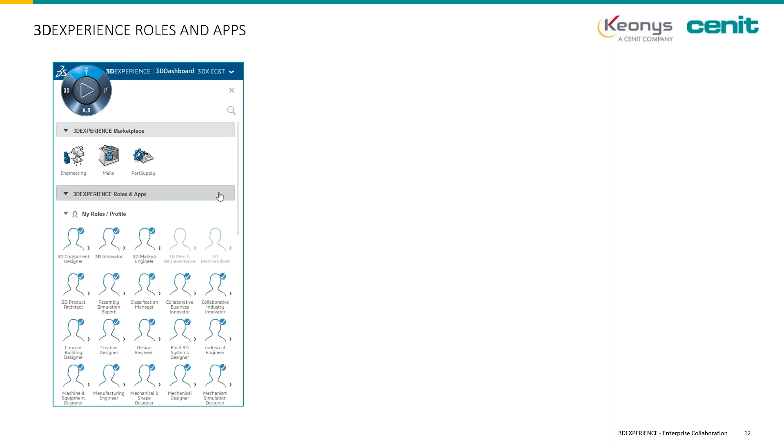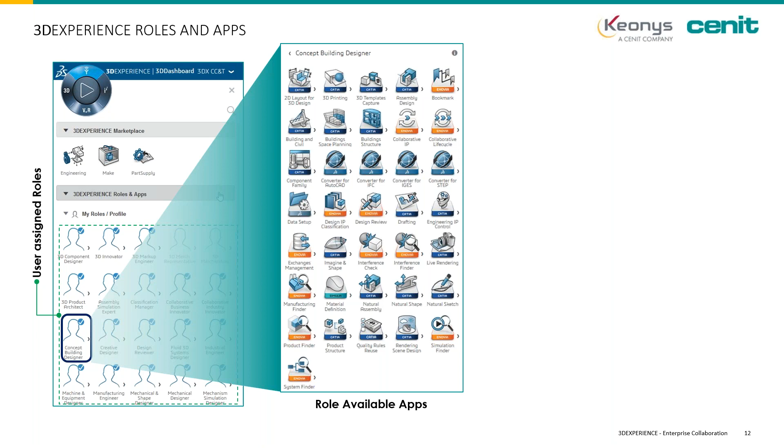If we look in the system, there's a lot of roles that you can adapt. Roles are more or less connected to licenses, and each of those roles is assigned to a user. There can be more roles assigned to one user if you want. Each of those roles has a number of applications, apps as we call them in the system, and these apps result in starting an application on your data where you can do either CATIA or ENOVIA or all sorts of functionalities on your process and data.

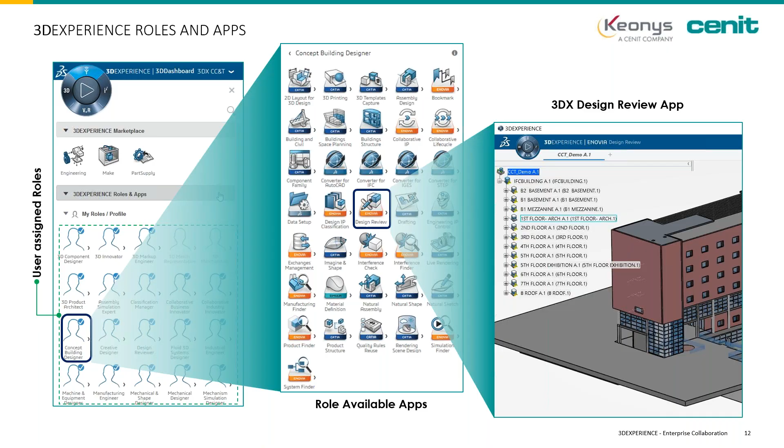We will see this in the demonstration later on how this looks.

If we look at the first level of collaboration, we talk about 3DSwYm for social collaboration and 3D Drive for sharing data. This is the very limited first level of interest into the platform, and it gives you the opportunity to do social collaboration. This means you have a sort of dashboard where you can share ideas, share information, talk to people, discuss with people, and funnel ideas into innovation.

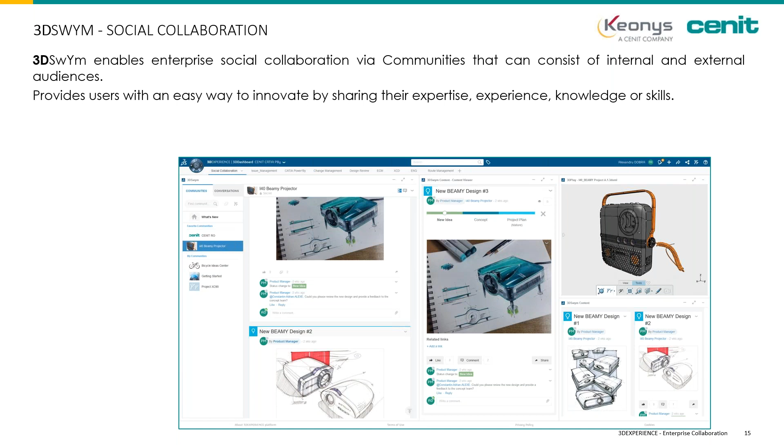This is the user interface. It gives you communities, and it gives you a 3D play to look in 3D at your product. You can chat with other people and share information.

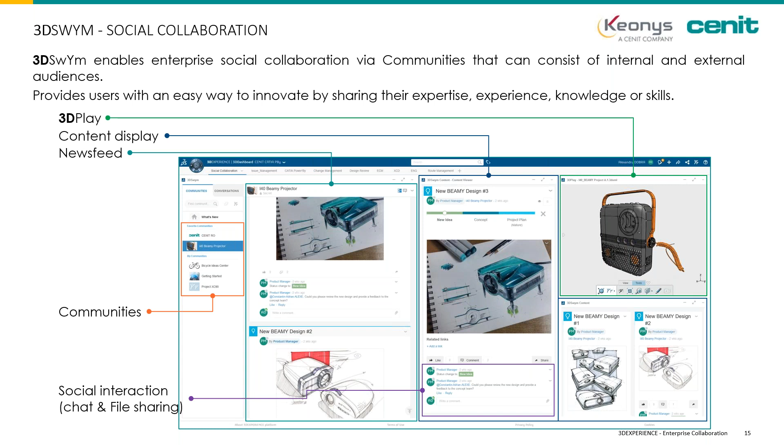3D Drive is also connected to that. This is a sort of cloud hard drive, like you have with Google Drive or with Dropbox. It gives you a very secure way of storing data in the platform on the cloud and sharing it with people that you want to share it with. And you have the tools to view the data, to use 3D Play for 3D viewing, and some tools for analyzing this information, making sections, and so on. It's a very simple way to start sharing information in a platform.

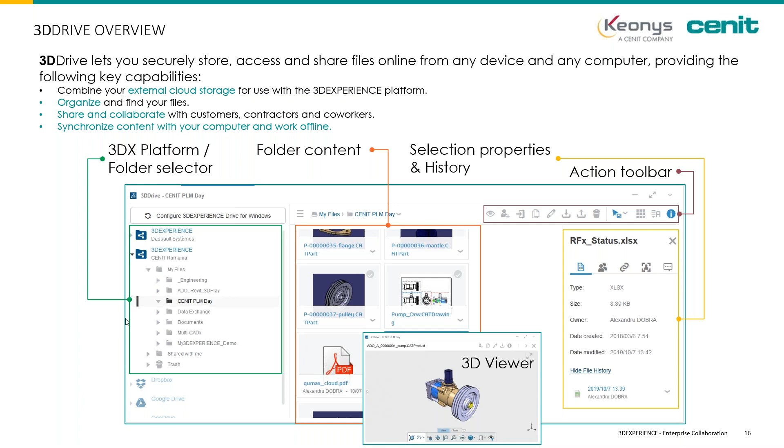And synchronize this, of course, with your local computer.

The next level is enterprise collaboration. This means that we really make a start with entering the world of PLM or PDM, whatever you want to call it.

Here we go to a way of getting data structured in a central database and using all sorts of collaboration on top of that. There's a lot of data files which are non-CAD, or even CAD data from all sorts of applications, not only Dassault applications like CATIA or SolidWorks, but also third-party X-CAD, as we call it, for multi-CAD implementation. We can put all this data into the central platform and use the processes on top of that.

We have the collaborative tasks where we can define the status of data. We have some routes where we can define how a product can be validated, checked, and released for production, all on top of all these types of data.

In the collaboration, we have all sorts of functionalities we can use, like team collaboration, collaborative tasks, and workflows, where we can define how a product is maturing and is being frozen for checking and released for going into production.

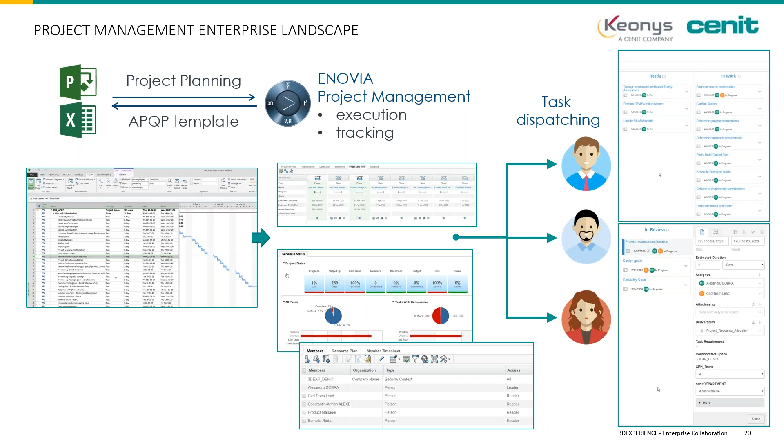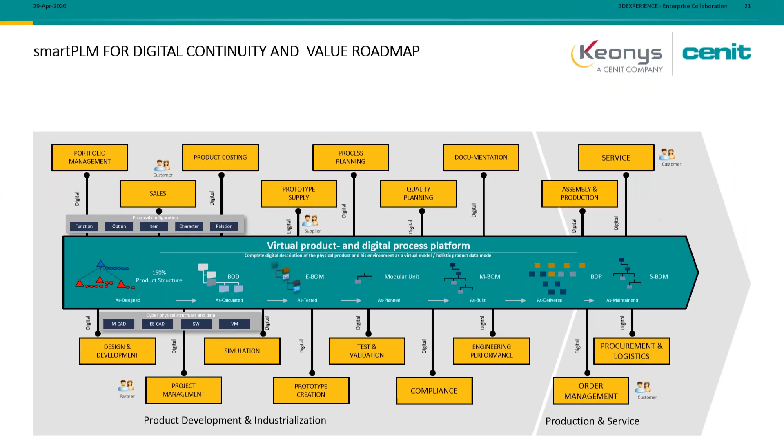When we look at the domains, for SME this is a typical process or definition of a company, with all sorts of department functionalities and processes, each creating data and interconnecting with each other if needed. Within a PLM system, we try to streamline this and put it all on a single platform.

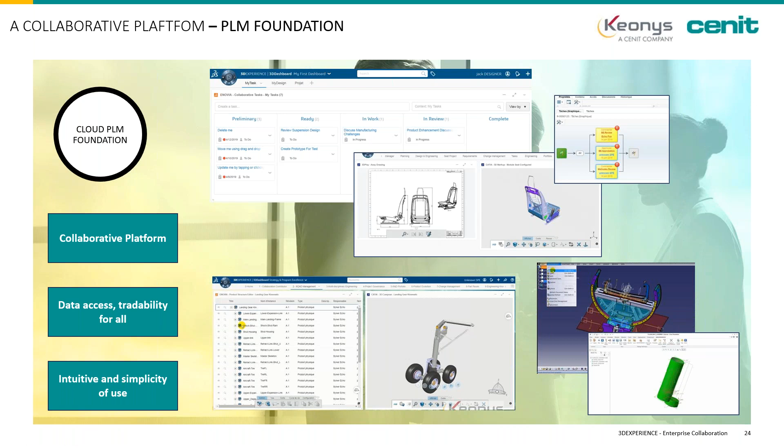It's not only CAD based, we can also take care of all sorts of document management. Here on the right bottom, you see integrations with the Office applications for Word, Excel, and PowerPoint, even connecting to the platform from that application to store your data centrally, find it using full text search, and keep trace of the maturity of your files or documents.

Here on the left, the full text search, where you can use multi-criteria to put filters on to find the right information in the right data, on the right level, the right release of the data.

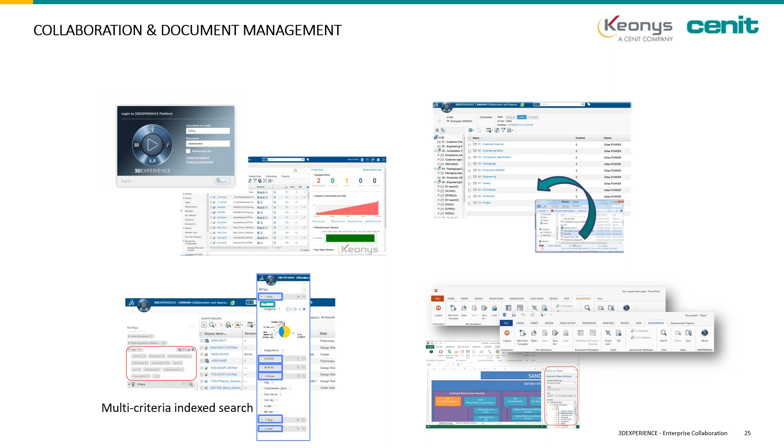And if we look at design, as said, it's multi-CAD. So there are integrations with CATIA V5, which we call multi-CAD because in the platform is CATIA V6 or 3D Experience CATIA, SolidWorks, your connection to NX, Creo, Inventor, and more to come.

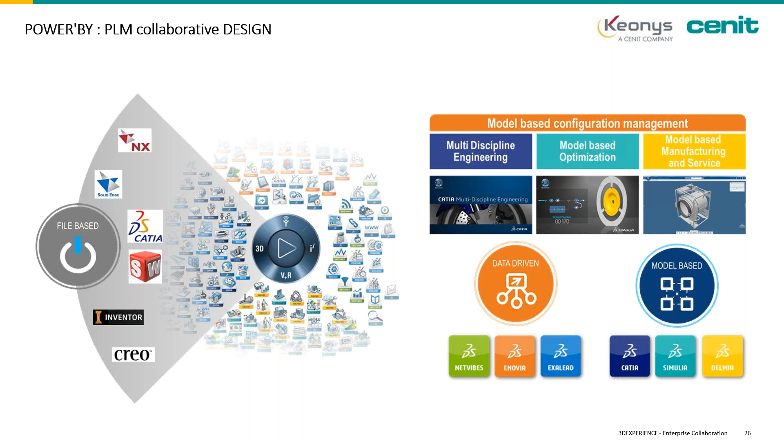And the model-based solution can be used on top of all this data. So if you want to go to full 3D using model-based definition instead of using drawings, having all the information including 3D annotations, you can put it on top of all this data. And it's fully data-driven and not file-based anymore.

Going down the road, engineering BOM management, where we have the right solution to go from your definition of your product, being a CAD assembly or a full engineering bill of material, managing the bill of material going forward to a manufacturing bill of material, going to ERP, managing configurations on top, and variants and so on - the full management of everything that has to do with your product bill of material.

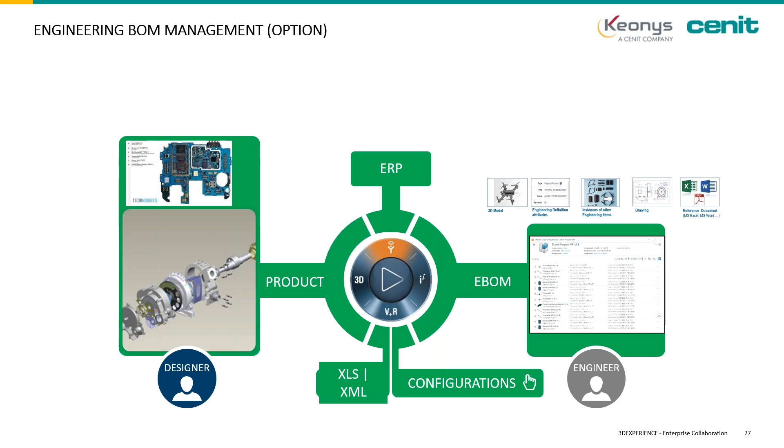If we look at program and project management options that we can put on top of that foundation, as we said, you see here the Gantt diagram. On top, you see the project manager view on gates, going from one gate to another, with nice dashboards to look at the status and maturity of the project, and even some financials if you want to. On the bottom, some risk management to see what the risk is within your project.

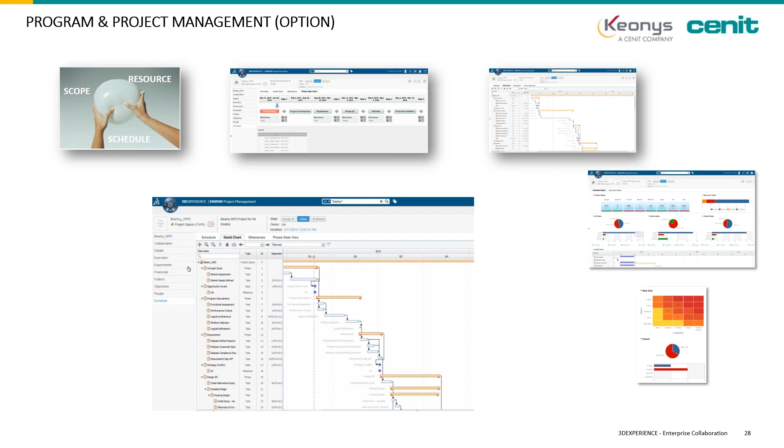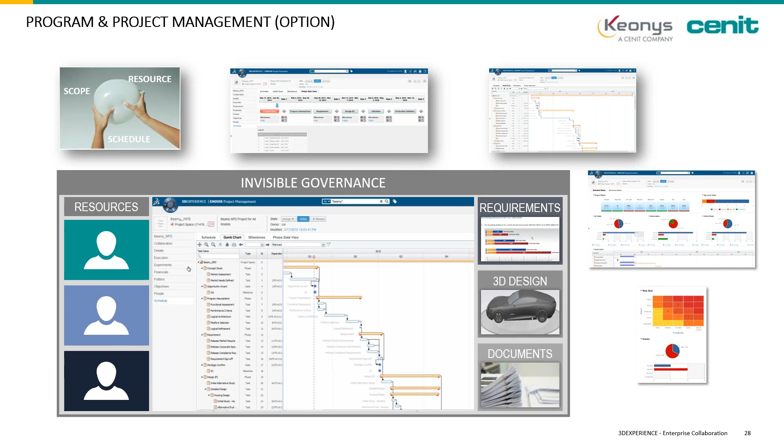And we handle resources, of course, we handle requirements, we handle all sorts of documents, and it's a complete governance overall, not only for one project, but there's a multiple view over multiple projects. So if you look at resources, you can see the load on a resource through the various projects he's connected to.

Here it is. In this, we will go over a review of the initial functionalities in the system.

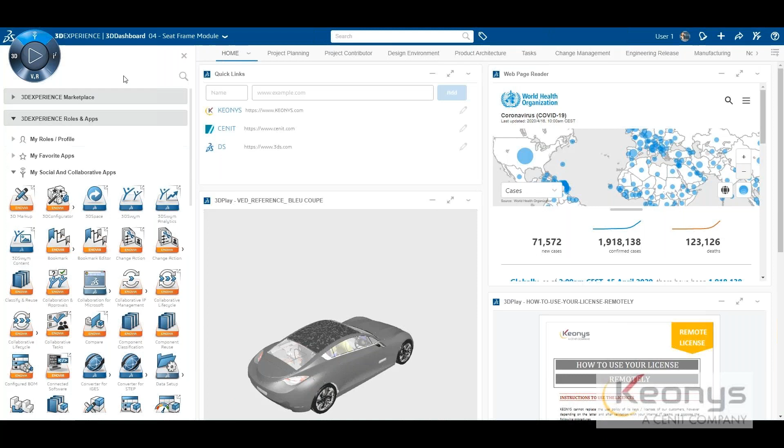This user has a lot of roles. Normally you have 1 or 2 or maybe 3. Connected to those roles, you see the applications you can use, and applications are called apps, of course.

And here's a dashboard. On this dashboard, you can share all sorts of information that you want to see when you log in. Like here, looking at the status of COVID at the moment, it's just a public website you have connected to, or you have some documents you want to see and keep track of.

Or you can even do some markup in this document, or any data here, you can enrich with remarks that are shared in the system.

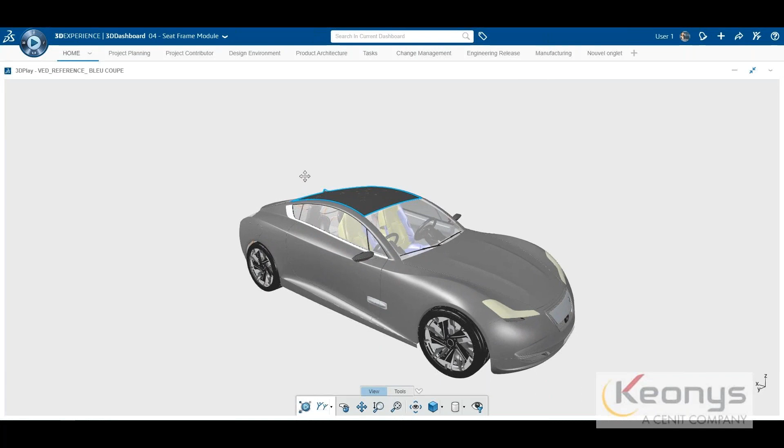Here's a 3DPlay functionality where you can have a look at the product. There's some nice functionalities, and this is all done from a web browser. You can have a look at the insides of a product using this kind of exploded view.

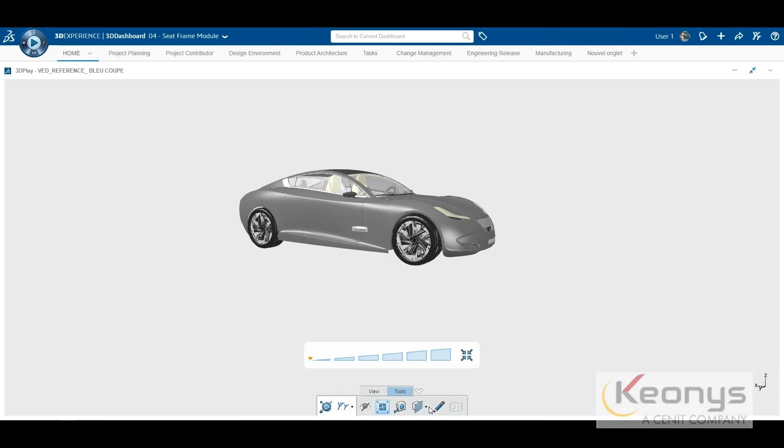This is a product with 600 or 700 parts, I believe, so it's quite large. It's not the full product, but it's quite large, and you see how it is handled in just a normal web interface. You can make sections if you want to.

Have a look inside and look at some of the details of the data. You can do some measurement on size, length, whatever you want to measure. And it's quite fluid in how to handle this interface.

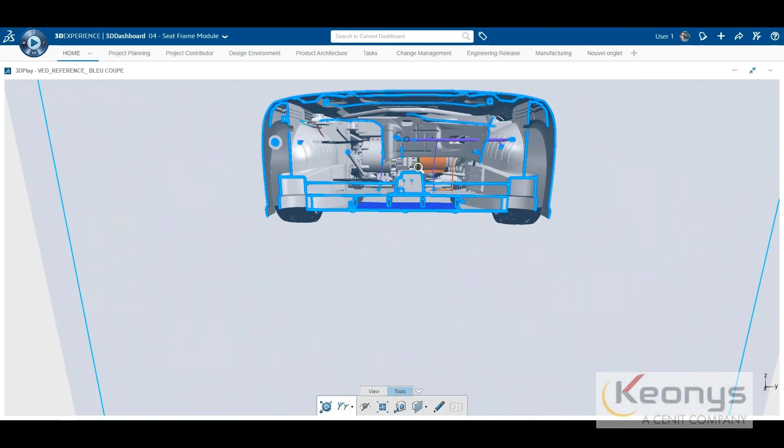We have some tabs. If you log in and you are a project manager, you do the project management. Here you see an overview. We come from the standard dashboard where you can define the widget, what you want to see. This is my project, so here you see the project you're project manager from, and you can see the status of that.

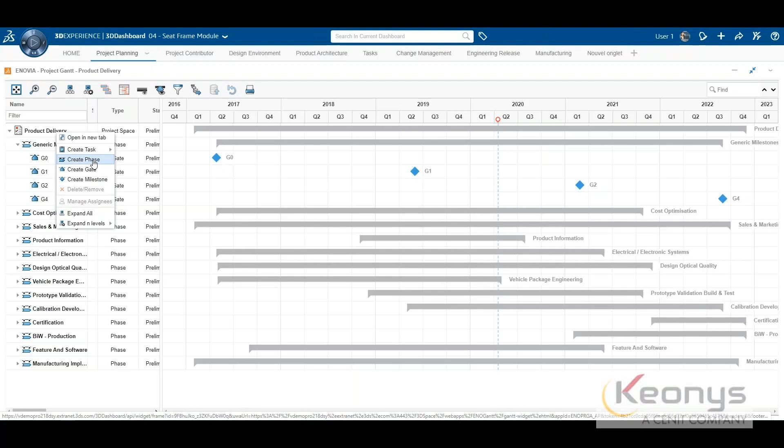If you look in a specific project, you can look into the Gantt diagram of this project. You see the status, where you are on the various steps and tasks that are defined here. You can define gates, phases, and milestones. It's like a Microsoft Project, but fully integrated in the system. And as said, each task has a connection to the data that needs to be handled.

Here you see the project contributor. This means this is somebody that's part of a project. He has been assigned some tasks. You can look at the data that is assigned to him. You can see the document, of course, and have a look at it. This is a PDF.

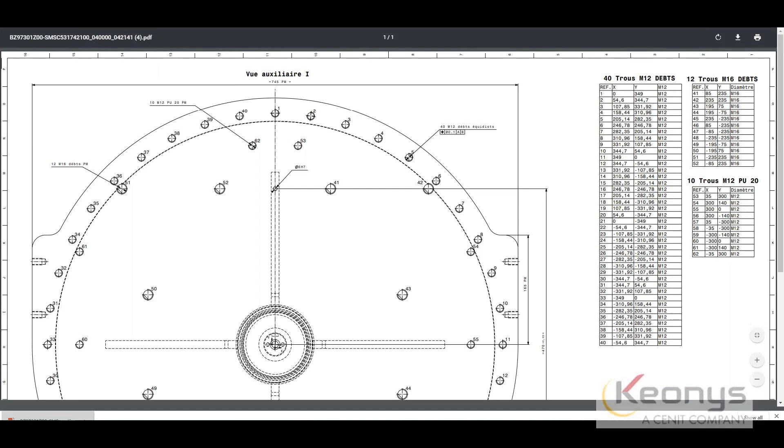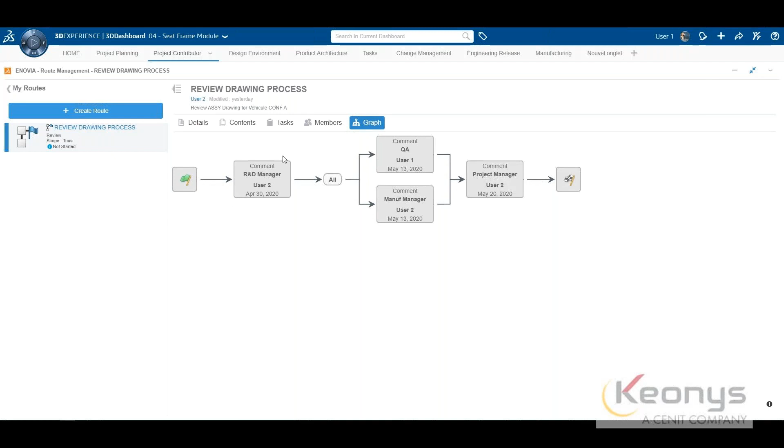Based on his access rights, if you look at review processes, you can also define that it's not just a simple review, but there is a more complex review using this workflow where more people have a say about this data before it's being released, like quality manager or manufacturing manager or whatever, who needs to say about this data before release.

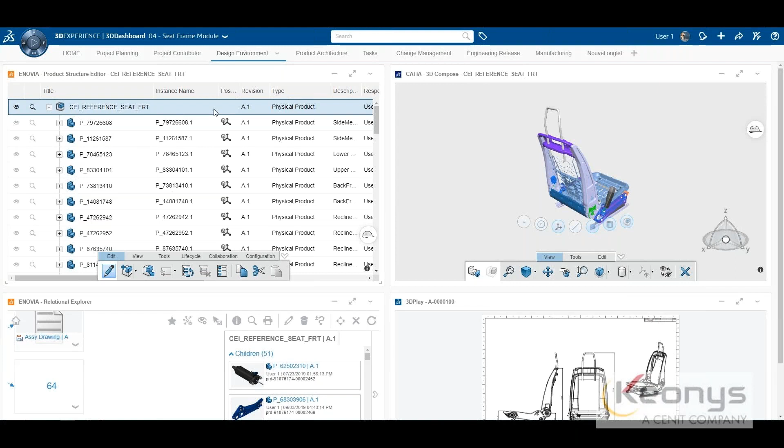And of course, the next phase is for the designer. Here in the Design Environment, you still are in the web browser. On the left, you see the product structure. On the right, you see the 3D player with the 3D data in there. You can look at that.

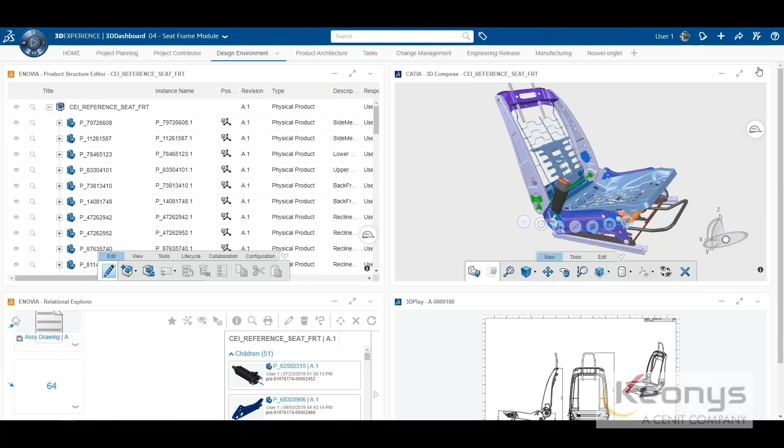You see what the revision of the data is. You can define new revisions. You can do some measurement here, define what you need to do before you start opening this in CATIA to make the change.

Some measurement being done, look at the size of this. Of course, this measurement is done on graphic data. That gives you an idea about size.

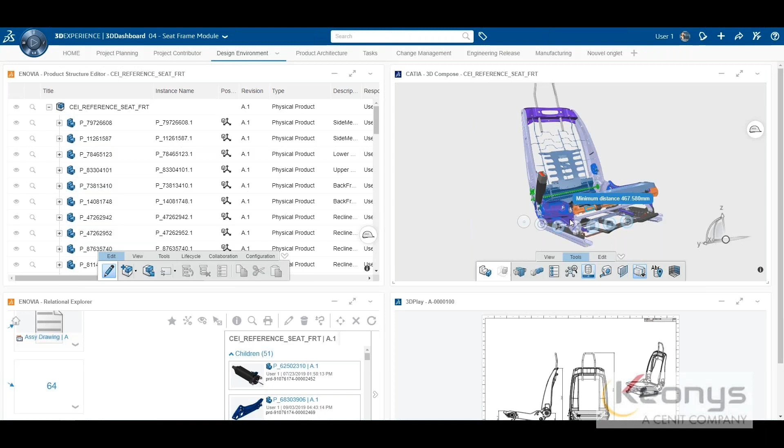And all derived documents like drawings can be done, can be annotated. You can define some text. You can make some nice annotations here, using the colors to get attention to the annotation.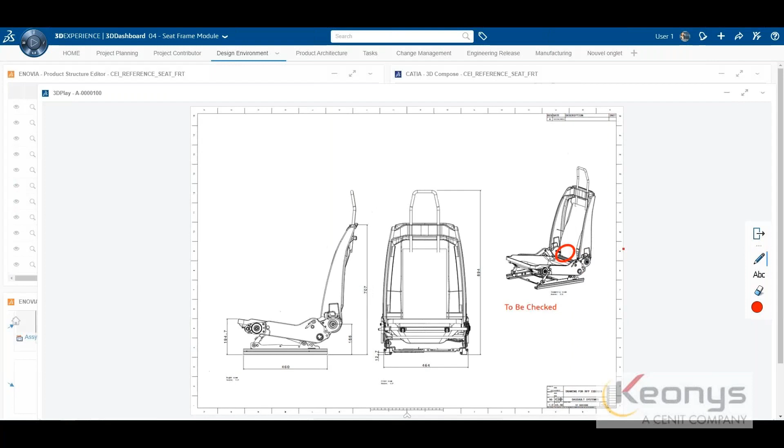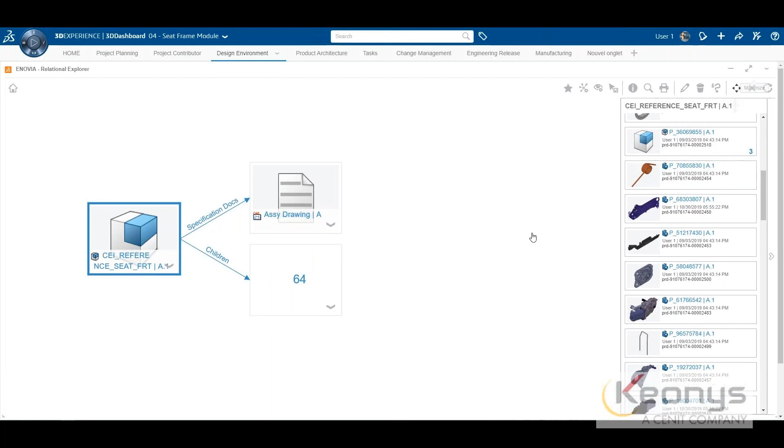And this is the product structure. You see all the individual parts, how they are interlinked with each other, assembly and the drawings, parents and childs from the structure.

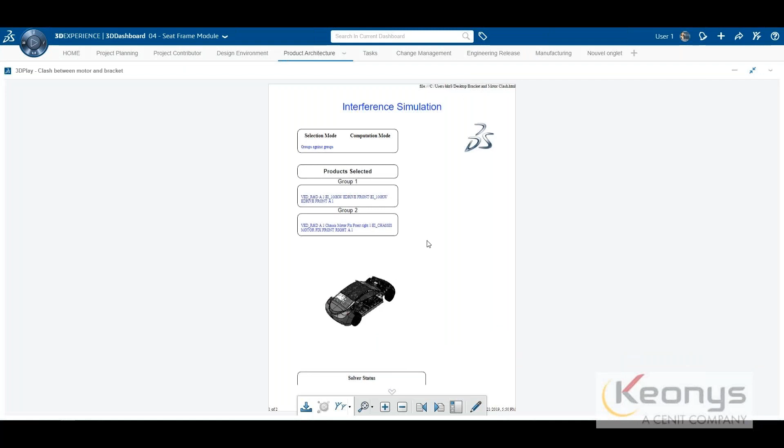If you're a product architect, you want to work with product structures. You define the structure of a product with all the individual parts. You don't put the content in, but you define the structure, the assemblies, sub-assemblies, all the parts, buy parts, make parts, and so on. You define documents, you define input information, requirements, you connect it to the various parts.

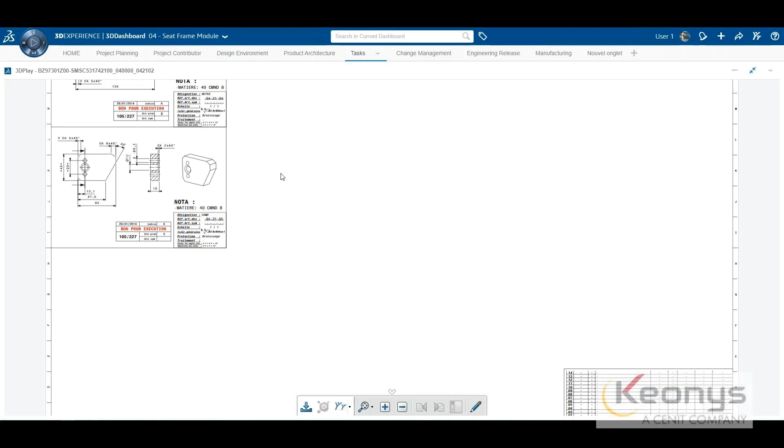If you are a project manager, you give out tasks. You see tasks for defining, checking data, releasing data, reviewing data. The viewer is all drag and drop, very easy. This is a 2D document. You can have a look at it, make some annotations if you want to finish your task, and this will be reported back to the project manager.

You go into change management. There's a dashboard where you can see what all the change actions are that are connected to you. If you take a change action to do the update for that bracket of that seat, you can see what the status of the information is, what the task is. You can look at referentials, context, dependencies. It's a full traceability of all the change management.

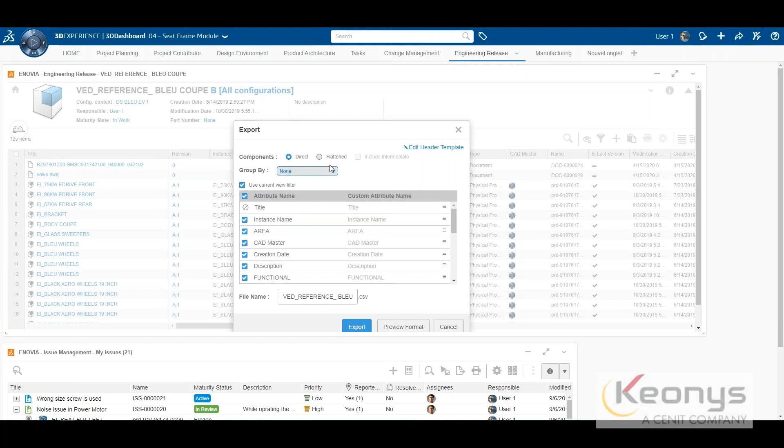And if we go to engineering release, we look at the product structure from an EBOM point of view, engineering bill of material. You can enrich that and export this to be used in ERP or in manufacturing systems. For now, this is based on the standard foundation, meaning that we have an export functionality to export this as a CSV file or whatever. If you are on premise and you want to have a connection to your ERP system, that's also an option, but not for cloud at this moment.

And here you see an export, and then you get this file, which you can use to integrate this into your ERP system in a manual way.

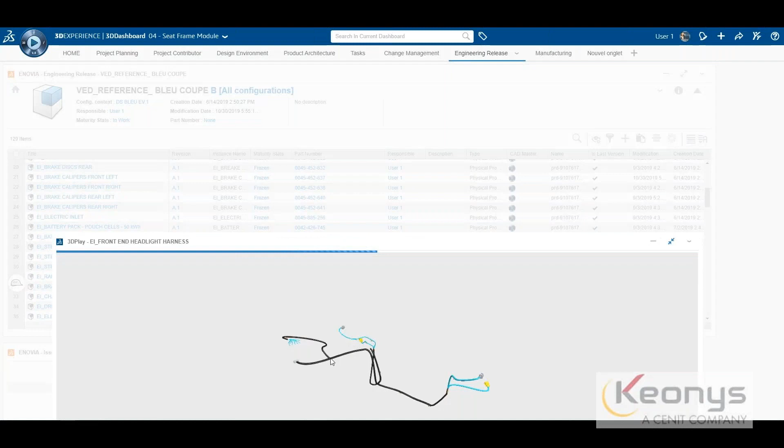And here you see some issue management on issues that have been recognized. You can look at that issue, the data is connected to that issue, so you can directly go into the data and see what it is. You don't have to search for it, it's all connected and integrated.

So if we look at design collaboration, that was the foundation. Now we will show you some examples on working with the platform from a collaboration point of view. If you need to work in Catia V5 or Catia V6 or SolidWorks, we give some examples.

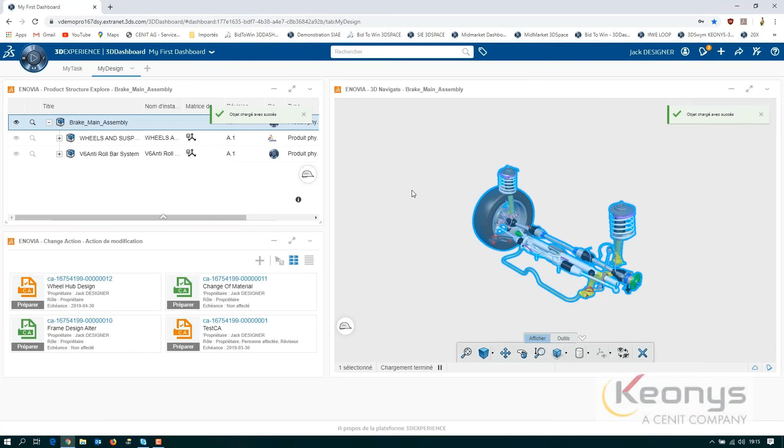This is an example from Catia V5, where we find the data using the full text search. We find the product, we say okay, show it in the player. We can have a look at what the data is, what the issue is, and on the bottom you see the change actions we need to do. We start our Catia V5 to load the data into Catia V5, change the data over there, and bring it back into the system.

So you're fully connected. You see on top also the menu, 3D experience. So this is fully connected to the platform. Only you use Catia V5 as the editor for the 3D. So this is typical Catia V5.

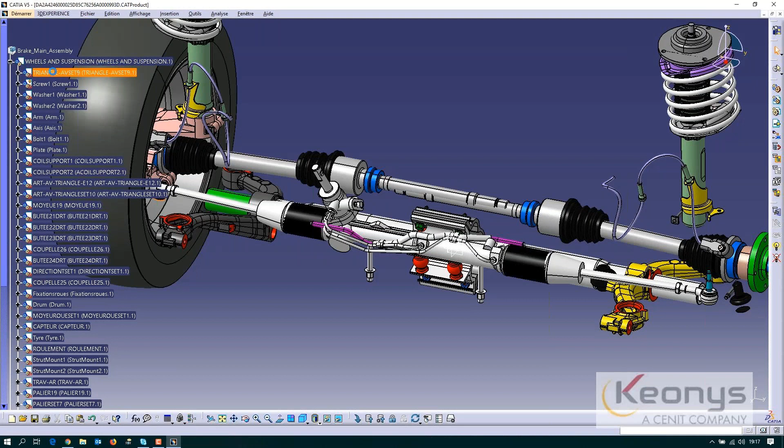If you want to search for standard parts to input a part into this structure, you can search in the 3D Experience platform. You can look in the standard libraries, the parts libraries. You find the products of your liking, and then you can enter it into the CATIA V5.

Like this pivot we need for this solution to add it to the structure. You can have a look at it, integrate it into the assembly, and put it back into the system. So that's the CATIA V5 example.

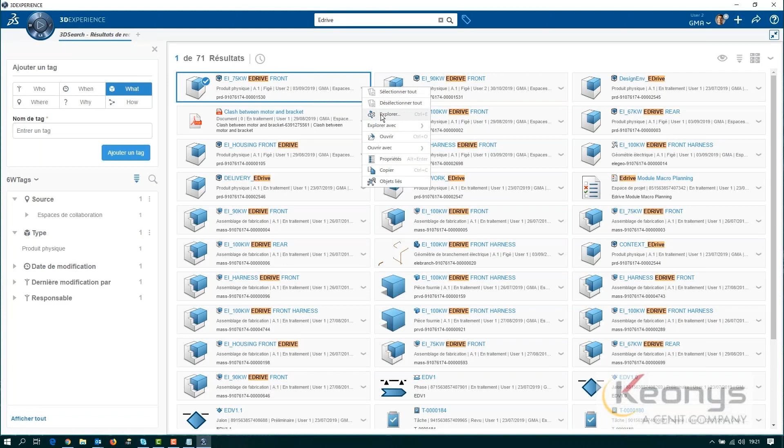This is a similar example, but then we use 3D Experience CATIA. In other words, this is CATIA V6, meaning this is the fully integrated CATIA. The user interface is the same as what we see in the browser - there's no difference, only there's what we call a thick client. So there's some software installation on your local workstation or laptop, but the user interface is the same. You don't really feel the difference between working in CATIA versus working in the browser.

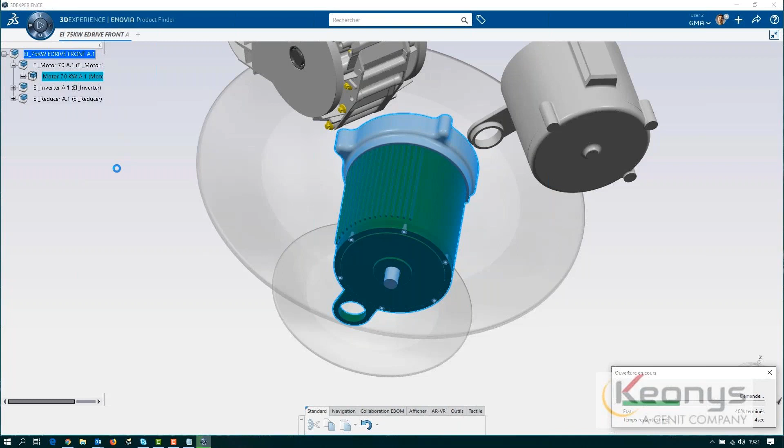Here we see an Explorer window, meaning that we search data, we can have a look at it in a very easy and light way to identify the information we need, like this electric motor. And if you want to work on that, we can open it in CATIA, 3D Experience CATIA. We will get an authoring window in which we can change the data, and then we see on the left the product structure or the CAD structure as we know it also from CATIA V5.

So similar. Here we see an example using SolidWorks. Here we look from the browser into the data structure. On the right, we see this is a 3D play with the information.

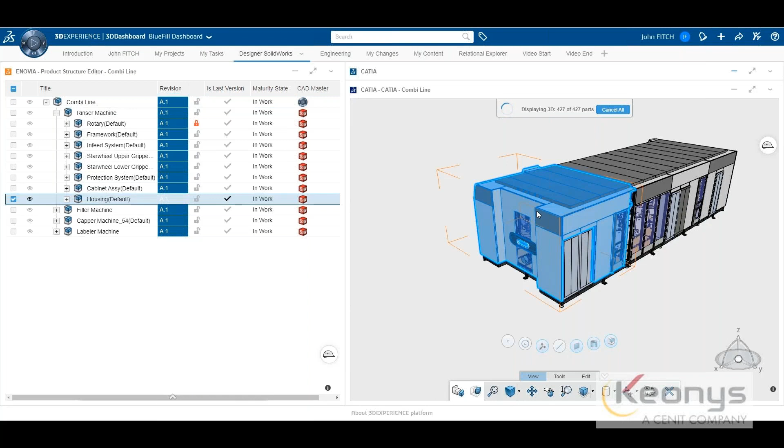We can have a look at that. On the left, you see that the parts are all in SolidWorks as file format. We can work on the structure to work with that. We can do all the management of the maturity of the data in here to say things need to be checked, need to be released. Here you see it's quite extensive assembly.

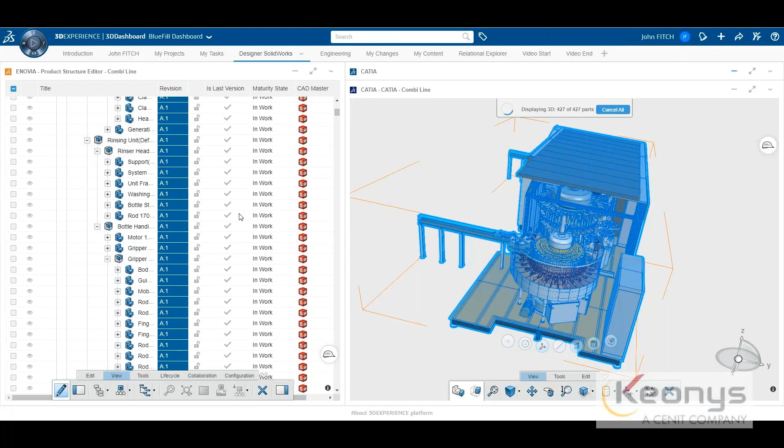But this is about the integration with some examples. And here we...

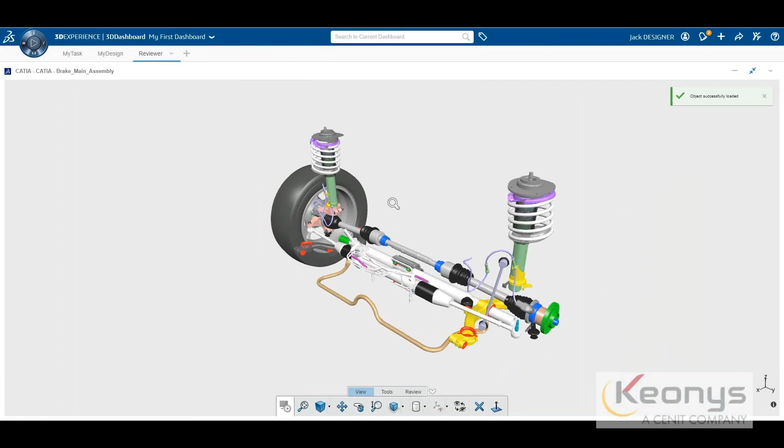finish with design review. This is also done from the web browser. You don't need any thick application for this. You load data into the 3D play. You can do some markups in your review where you say, I have some comments I want to add. I need to do some measurement, and I want to share an image from this.

So you can make an image like a snapshot using that camera symbol, and then you get a slide with this view. You can make some annotations in here, connect it with a leader, put your text in, and create another snapshot. These snapshots can be shared with the designer or the project manager to make decisions.

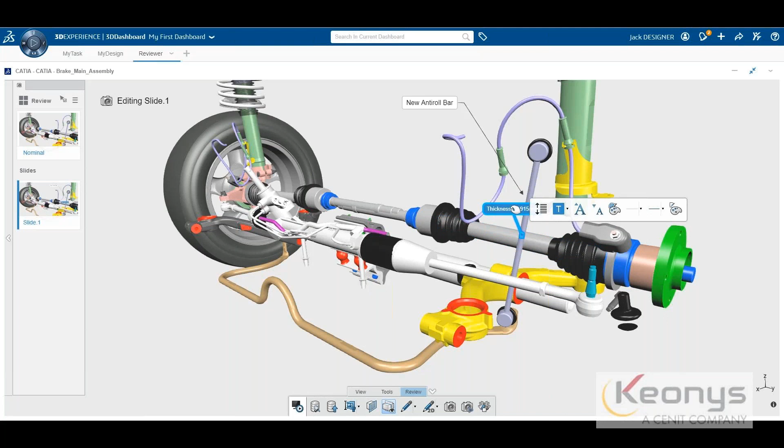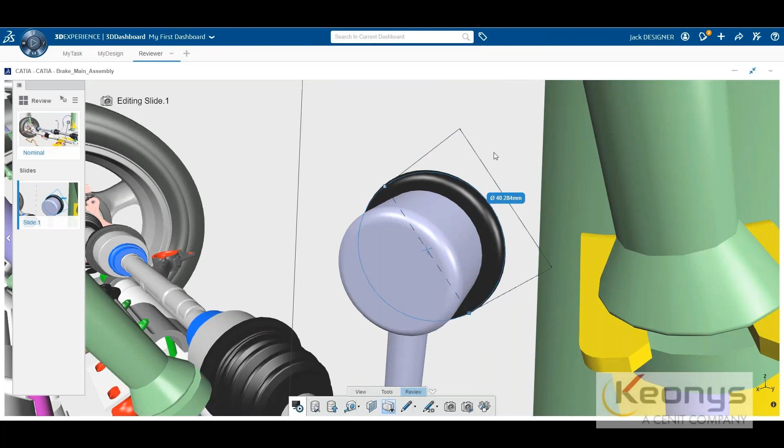Measurement, thickness. Measure like the diameter. It's 3 points for this. We use graphic data to analyze this. We store this, and then we make a snapshot. On the left, you see all these snapshots where you can jump to see the various views that are being defined by the reviewer.

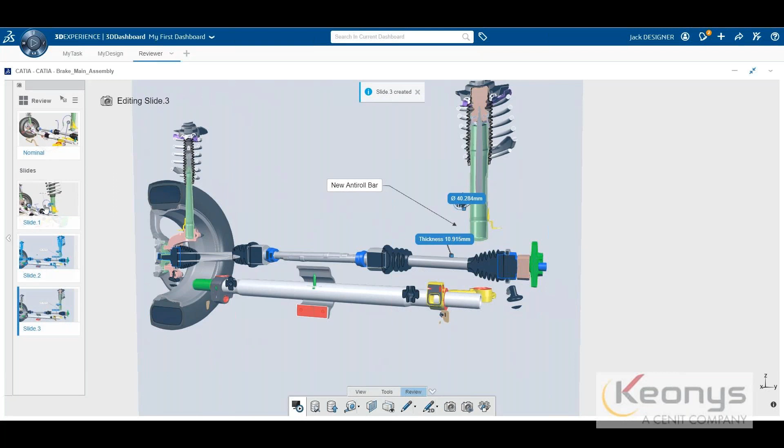Make a section, product, to have some inside view, and create another snapshot. So this was a very quick overview of the demonstration of the various subjects that we have in the platform.

So finalizing, I need to check my time. As Keonys and CENIT, we have a specific way of bringing it, implementing this to our customers. As said, start small and start now, meaning we start with this foundation that I showed you. On top, you can put some options if you want to and move it into smart PLM, fully covering a certain industry, and eventually ending up with a complete business platform.

And how do we do this? We call this process of doing this, we call that ready for cloud. So we need to onboard you onto the cloud, align it with your way of working, and deploy it. And of course, there are some needs on your side.

So we have a solution for that in 4 steps, where we work on general presentations and awareness to show you what's available and what we should do, which parts should be included in that first step. We do some training for key users so they can be involved in discussions on how to implement.